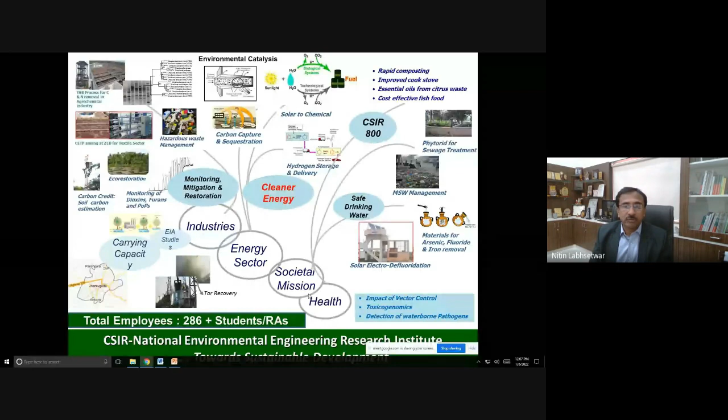This is a brief of activities we carry out at the Energy and Resource Management Division. Being at NEERI, we focus mainly on cleaner energy use rather than energy generation. We actively work on diesel emission control from automobiles as well as diesel gensets to reduce the environmental footprint. We also work a lot on catalysis, because catalysis is one of the ways through which you can control emissions. We also work on a process called chemical looping combustion, and if time permits, I'd like to give details, because this is one of the processes for CO2 capture.

Okay, and probably you will get more details in the next talk. A colleague of mine works on the fuel cell.

Then there are some problems which are specific to India, or developing countries, whatever you like to call it. For example, cook stove - you will be quite surprised that the health burden or environmental burden, mainly the health burden from cook stove or chula, is extremely high. Until a few years ago, it was probably the highest among all sources of air pollution. So in precise words, if you talk to any experts about 4 years back, maybe during 2015 or 16, what was the health impact from different sources of air pollution, they will say the maximum was from chula, not from automobile, and not from industry.

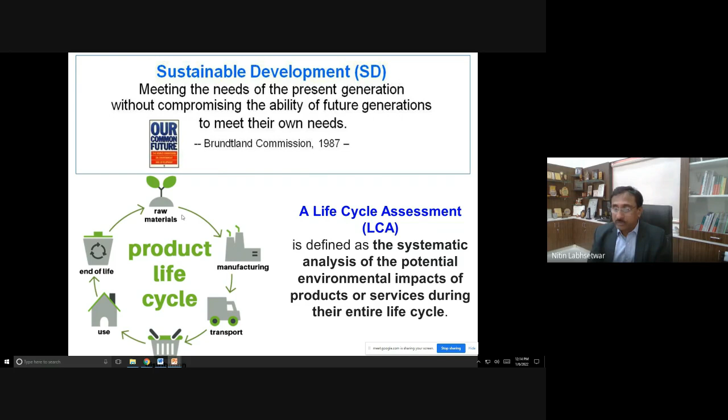It will also have environmental impact. So every process from cradle to grave is divided into different process components, and the environmental impact or environmental footprint of every bit of a process is estimated. And then you will suddenly realize that it's not so easy, or the process which was looking probably greener.

I have written LPG as a quick example. We all know the liquefied petroleum gas, it's propane. So I'm using say one cylinder, roughly 14 kg or 10 kg. I know the formula of propane, I know 10 kg of propane in a month will give me this much CO2. So I can calculate that I'm using one LPG cylinder per month in my kitchen. So my CO2 footprint of my cooking, or maybe I'm using a water heater also using LPG, is 10 kg of LPG per month, which is equivalent to say 20 kg of CO2. So I'm emitting this much.

It's not that simple. How is the LPG produced? You are extracting crude oil. For extracting crude oil, you are investing energy, so there is a footprint. Then you are transporting crude oil from Saudi Arabia to an Indian port, such a long way, and there is a CO2 footprint, an environmental footprint, because you are using a ship, and the ship has got a life. So after 20 years, I'm going to break that ship and produce a new ship, so I need to consider that ship manufacturing also.

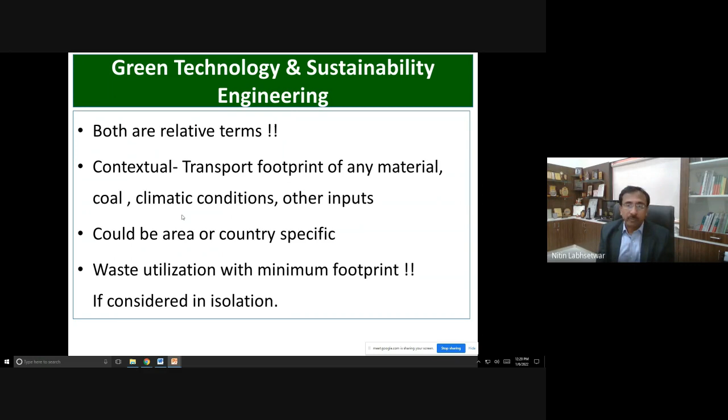So now, who all can contribute in this domain of cleaner technology or cleaner energy or green engineering? I believe almost everybody, especially engineers - chemical engineers, computer science experts, IT experts, even ENTC experts, chemists, biologists, geologists, thermal engineers, mechanical engineers. This is an area, in a broader way energy and sustainability, wherein anybody can work. But this also tells us that it is highly interdisciplinary, and generally collaborative approaches are very, very important. Even social science is important.

Now, a couple of slides on the impact of the COVID-19 pandemic. Now we are embracing the third wave, but so far the economic activities have not slowed down, for obvious reasons that we can't afford it. We have to manage with COVID.

But if you see the COVID pandemic, during the first complete lockdown there was a clear-cut reduction in energy demand, especially oil and coal, because there was an opportunity to use solar. Our power requirement was reduced by 15%, sometimes even 18 to 20%. So we reduced oil and coal consumption because we know those are dirty fuels, and we also knew that more or less the solar is coming for free - even if you are not using it, it will be produced and wasted.

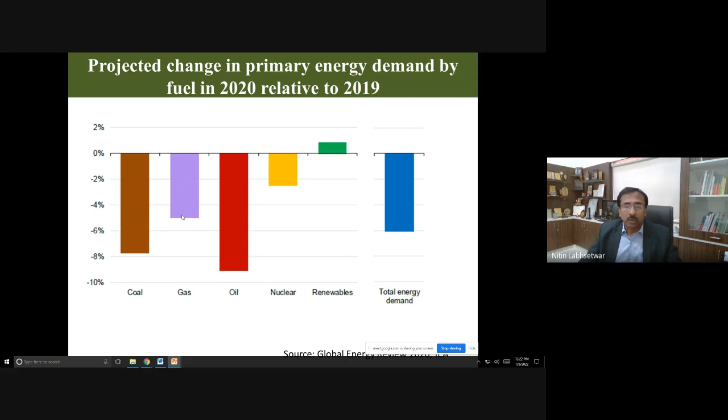This was the scenario during 2020 as compared to 2019 when we had the first wave of COVID. Obviously when fuel was used less, energy was used much lesser, so the CO2 emissions were also lower. This was evidence that the contribution to global or atmospheric CO2 is very, very significant because of energy use, because there is sometimes debate that natural sources are too many, including animals, vegetation, and biological processes.

But this was quite evident. Actually, I would say this was a very rare opportunity for environmental scientists and many other scientists to do a lot of experiments and try to validate what we are trying to correlate, based on the monitoring we do for CO2 and a lot of modeling that scientists throughout the world are doing.

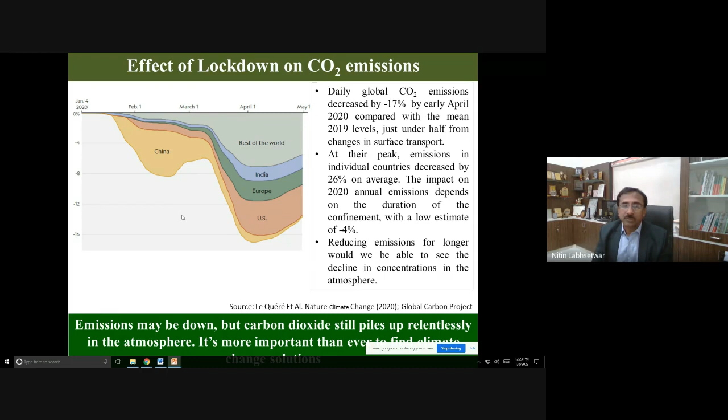So if it is true, this was an opportunity where we can find out that the CO2 emissions dropped, because we started using less energy, less fossil fuel. This was quite proven, roughly 8%, which was quite significant.

You must have seen these kinds of pictures that nature is back to its beauty and has already restored itself. But there were some over-enthusiastic conclusions that the government doesn't do anything, the agencies don't clean up, and nature did this job so quickly. It's not like that.

It's a competition between nature and human beings - how much capacity nature has to assimilate and to repair. That's a fact, and this capacity is huge. But as if we are competing - the nature can take care of this much CO2, so we'll try to introduce more CO2 - which is crazy, which is disastrous.

So this is very good evidence that while emissions were dropped by 8%, 10%, 15%, still nature was not able to take care of itself. These are very interesting findings.

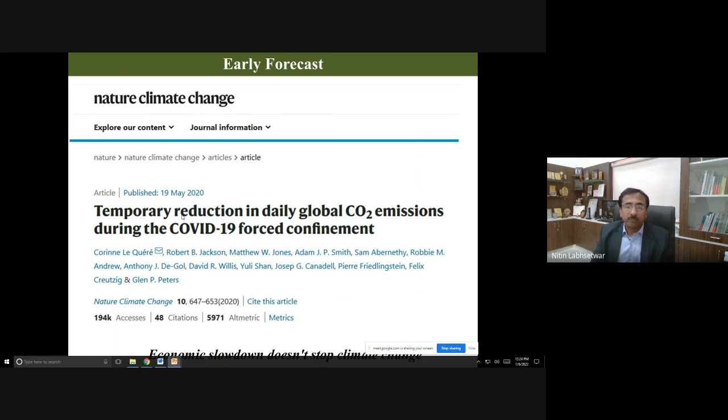First was the Spanish flu. Many of us were not aware of this word before - we got to know about it during COVID or the Corona pandemic. Then there was an economic depression, then World War II, and then finally the COVID pandemic.

Now, if you're not from the energy domain and you read the news every day, it's a bit confusing. Why? One day you will read that India's coal import is rising - we have enough coal, too much coal, but it's not clean, yet we still need to import.

The next day you will read something very good about solar - we have already attained like 100 gigawatts of renewable or cleaner energy, which was better than what we committed during COP21, I think 5 years back. Then the next day again you'll read something about thermal power plants. It's all confusing. And then the next day you'll read that climate change is the reality. So why is it so?

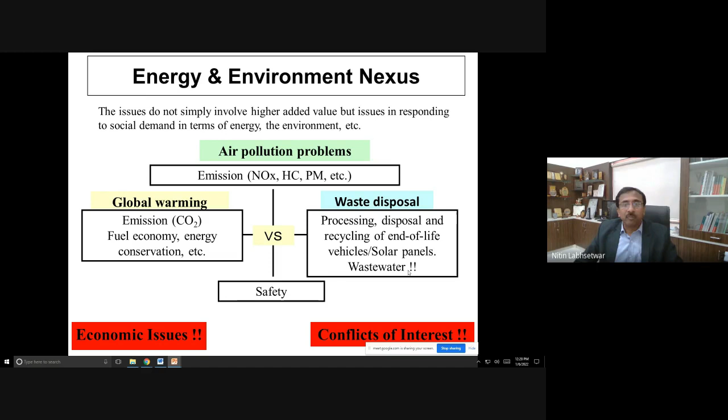Today, probably the global warming of CO2 has become very important, and at NEERI we often discuss that because of the global warming and CO2 problem, people don't want to deal with other problems, for example the sulfur dioxide problem, which is equally important. So this is the issue.

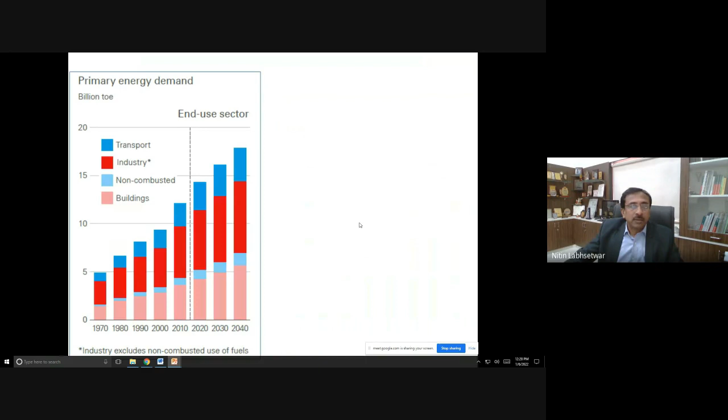Now if you see the growth of energy demand, we quickly see that India is probably the fastest progressing economy. Economy means energy, and energy means, of course, the CO2 footprint and the environmental footprint. This is the contribution of different sectors to energy consumption.

This is one of the databases, but things are changing very fast, so there are some changes. Even if you see the projection of credible agencies like the International Energy Agency, today we are at the beginning of 2022, and the way we are progressing in solar, it looks like by 2040 everything will be renewable. We don't have to worry.

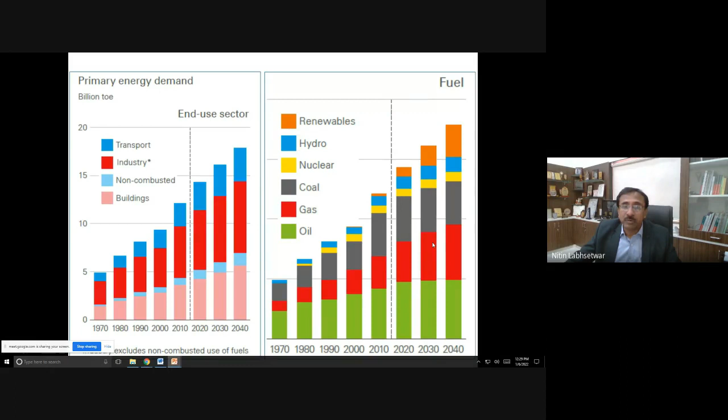In case of more energy, you can see coal, gas, and oil will still dominate even after 20 years. Why is this happening, when we are very clear that we are on a wonderful path of solar energy generation, biomass, hydrogen, and all these things?

The simple reason is this: today if you need 500 gigawatts, and say your share is 100 gigawatts from cleaner or renewable energy, tomorrow you are targeting 300 or say 250 gigawatts, so now you have achieved 50% by the cleaner route. But unfortunately, now your demand is no more 500 gigawatts, it is increasing to 700 gigawatts. And after a couple of years, when your renewable energy generation touches 500 gigawatts, and we are very happy that we are producing 500 gigawatts and all our needs are met by cleaner energy, unfortunately your overall energy demand will shoot to 1,000 gigawatts.

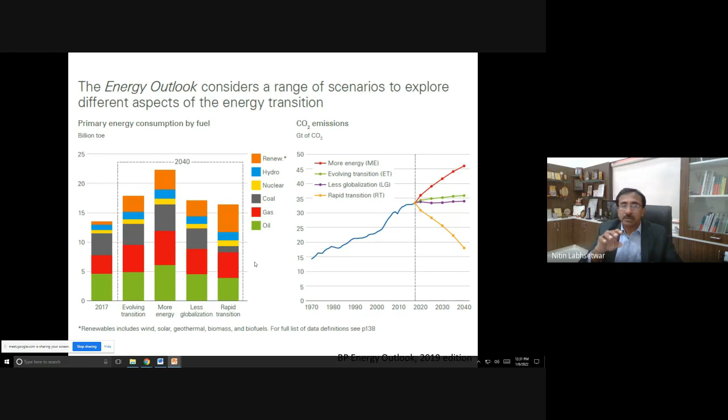And that's the reason why for the next two decades or more, we have no option but to continue with coal based energy as well as a combination of other sources, including fossil fuel or carbon based. We will have a mix. Let's be optimistic though, because if some innovation comes for hydrogen and other sources, our share of fossil fuel based energy production should go down. That's what is called rapid transition.

About 80% of the coal power plants are in India and 4 Asian countries. You must be thinking India is such a bad country, still using coal. No, we are among the best countries when it comes to renewables. We should also understand that for the last 100 years, the developed nations have been polluting. China polluted for the last 10 years, and now they are on the path of renewables. They probably have the best growth like India in renewables, they are touching 1,000 gigawatts. But when their turn was there to develop, they also polluted. So now it is our turn, and despite that, we are still using as much renewables as possible.

We cannot stop coal. Always remember, whenever we are debating energy and environment, these are secondary things for those who do not get enough food, enough water, or enough electricity. For them, the priority is to get good education and good food, so you cannot compromise on development. That's why it's a very tricky, very complex thing to talk about sustainable development. You cannot stop using coal unless you have equal amount of equal cost energy access through renewables, because no country would like to compromise on development, and it is necessary and justifiable also.

So under these circumstances, what becomes extremely critical is that we should not waste energy, whether in the developing world or the developed world. Because when we are talking about development, that I want to feed every hungry person, I want to educate every rural kid, for that I need energy, I cannot compromise on energy. So how can I afford to waste energy by, say, excessive air conditioning or many other means?

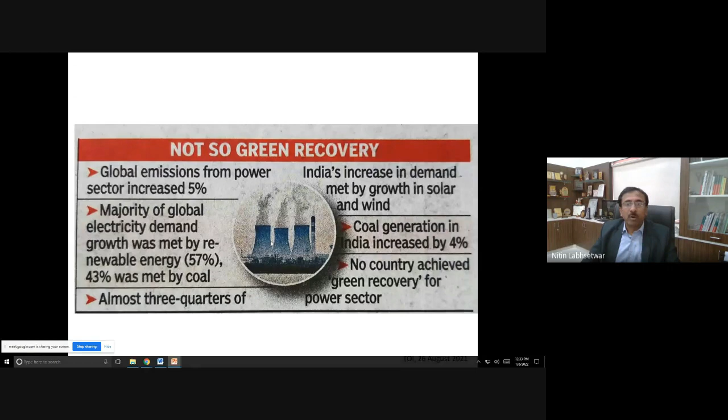So there's a huge amount of planning and modeling that goes into that. I'm not going to talk about it, maybe there are many experts. Now, one thing is for sure, that we need too much energy. We are trying our best to produce clean energy, including solar energy. We are doing our best.

But can we look into the consequences of global warming, which is happening? Unfortunately, it is already there and has been there for quite some time. But in the last couple of years, we have seen it with our own eyes. So that is making an impact.

Scientists knew, you also know, IPCC knows. They produce a report every year saying this is happening, that is happening. But now, when we see a disaster, like flooding, excessive rain, untimely rain, storms, drought, extreme temperatures, agriculture crop loss, then we realize, okay, yeah, it is happening.

Like COVID, the virus is there, we can't see it. When it starts hitting you, then you are worried. Not everybody is worried. When it starts killing you, then you are really worried. So the same thing happens as far as human perception is concerned. This is absolutely there.

So far, what we have discussed, the inference is: one, fossil fuel consumption is likely to increase for a few years, and after that it will decrease. But fossil fuel use or consumption will be there for a minimum of 2 to 3 decades. Unfortunately, there's no assimilative capacity left as far as air pollution is concerned and as far as CO2 is concerned.

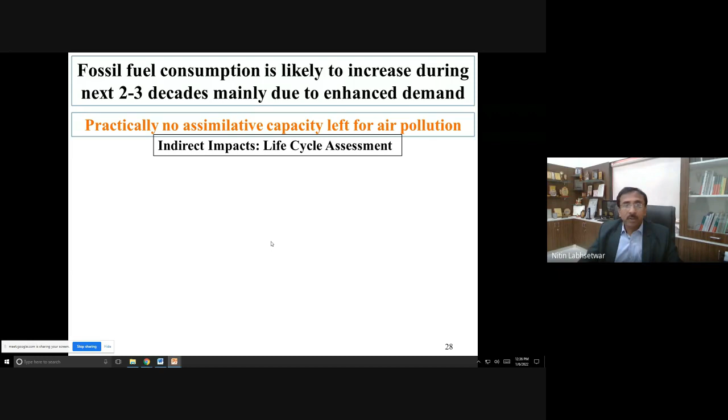Now, to understand the indirect impact, as we have seen, we need to do the life cycle analysis of everything. So there are two fundamental aspects of environmental pollution: one is greenhouse gas emission, the CO2, CH4, and others, which is a global issue. And the conventional pollution, like air pollution from a small industrial chimney, air pollution from your vehicle, say an old vehicle, air pollution from many other things, garbage burning, and all that.

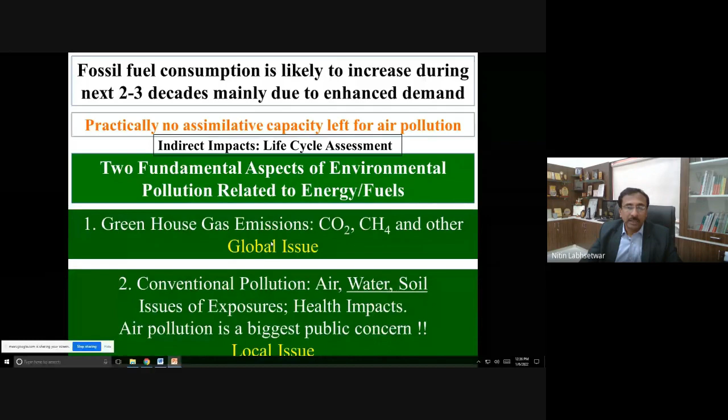Then there is a water pollution issue from energy production, soil pollution issue. There are health issues, for example, from the cook stove. These are the local issues. So let us quickly try to understand what are the CO2 or GHG emissions.

You will get the best literature, best slides after COP26, about what is the average warming projected for the next say 80 years. What is the issue with 1.5 degree? What is the issue with 2 degree? It's a very complex thing to understand. So you need some parameters which will be easy to understand for everybody, including scientists or professors like you, and then you can go into the complexity.

One such issue is global warming. We all understand the greenhouse gas effect, what are the greenhouse gases like CO2 and many other gases which get accumulated in our atmosphere. We get a lot of solar radiation coming to the earth, which is absolutely necessary for the earth to keep warm, to keep biological processes happening, natural processes happening. A fraction of this heat goes back to the atmosphere.

It gets trapped by these greenhouse gases, which were there, and it is required to be trapped. Suppose you get say 100 units of energy, out of which suppose 30 is going back, so you are left with 70, which is not enough for you. This is just to explain to your students. Suppose you are getting 100 units, 30 is going back, and there are some gases called greenhouse gases. Out of this 30, they reflect back say 10, and you are getting 80, which is required for you.

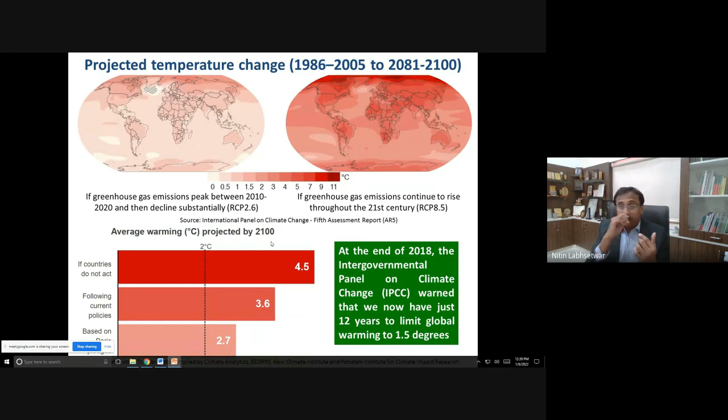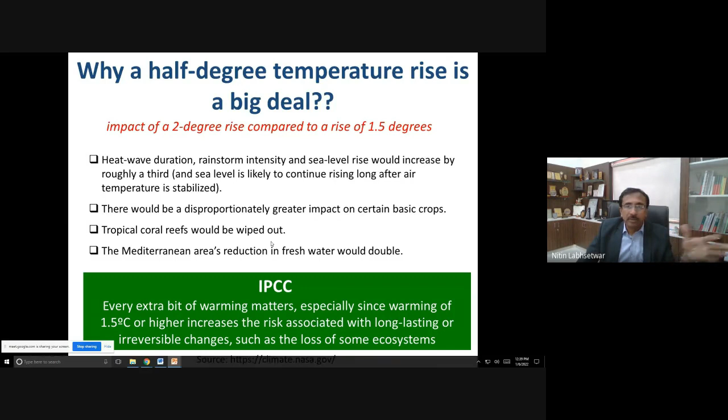So why does half a degree temperature make a big deal? Biologists can easily tell you, because most biochemical processes are very temperature sensitive. It can run havoc if you increase the temperature by 2 degrees Celsius. We have already seen so many coral reefs wiped out even with half a degree temperature rise, especially affecting marine biology and practically everything, as we've seen in the last two or three years.

So there are two questions. One is, what are the sources of these emissions? Second, why are the impacts so complicated, wherein we should also understand something like biodiversity.

I'm not sure we should cover biodiversity here, but try to understand from biologists that it's not easy to lose even one species, one plant or one animal species, because it can have serious repercussions. We are not losing just one species, because we have got millions of species.

So first, let us see what are the indirect emissions, or the emissions we need to tell our next generation, especially students. For example, moving or transportation. So cycling is the best.

So you are cycling every day, say 10 kilometers, which is a good habit. If you are using a bicycle instead of a car to go to your office, you're doing a great job because you're reducing your CO2 footprint. But if you are eating too much and doing cycling just to maintain your weight, I don't think you're doing any good.

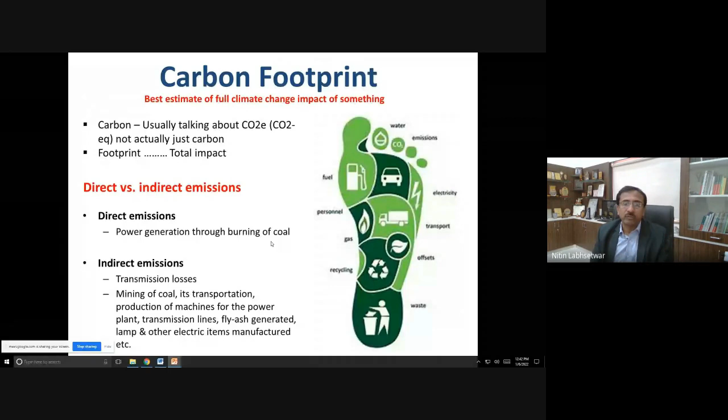This is something to do with water. One quick example: to produce one shirt, you need to consume on average 2,700 liters of water.

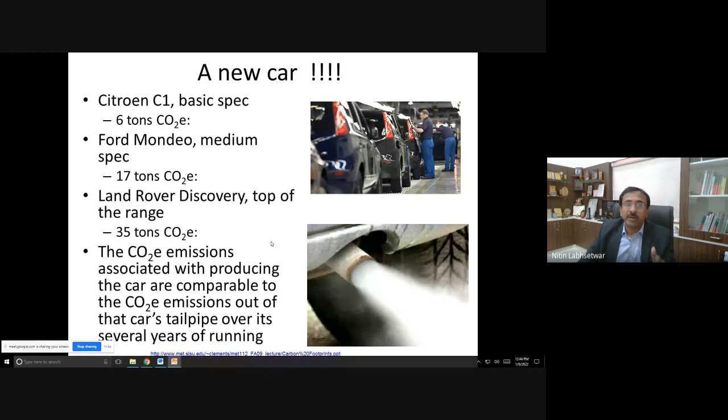So this is one example of water footprint. Similarly, we understand that to produce a new car, we need a lot of energy inputs. It's not easy that we calculate only the CO2 from the exhaust coming from the fuel. We need to understand the footprint during the production of the car.

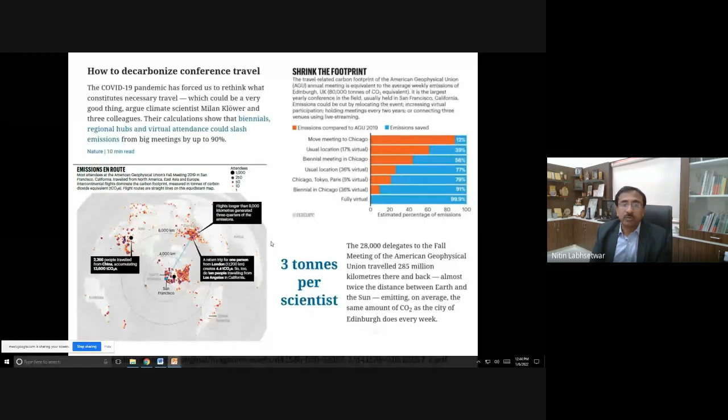This was a very nice example. Last year our conference was turned into an online conference, and everybody was disappointed. But there was a calculation of how much we could save, 3 tons of CO2 per scientist because of this online format. Today, for example, we are almost 40-50 people, and I'm here, and we didn't travel. It may not be making that kind of an impact because we are not having an eye contact and we are not together, that's a different thing. But today we are going to save a huge amount of CO2 which is coming through travel. So these are the efficient ways.

There may be hundreds of microorganisms living or surviving in the body of the tiger, on the tongue or skin of the tiger. And if the tiger dies, maybe 1 or 2 or 5 microorganisms can't survive. We don't care about those microorganisms, but maybe those microorganisms are responsible to control the growth of some virus. So tiger gone, 5 microorganisms gone, another virus is proliferating. So these are all interrelated, which is very hard to understand, hard to map in fact.

So the best thing is to save each and everything nature has given to us. It's not easy to say, oh, this much is lost. So we need to look into the carbon footprint of all resources we consume, and the carbon footprint of final energy delivery. Life cycle assessment or life cycle analysis is a very useful tool to understand different energy options, different production issues, different processes, and how to reduce the overall footprint of energy. We understand for our life, we need energy, for practically everything we need energy.

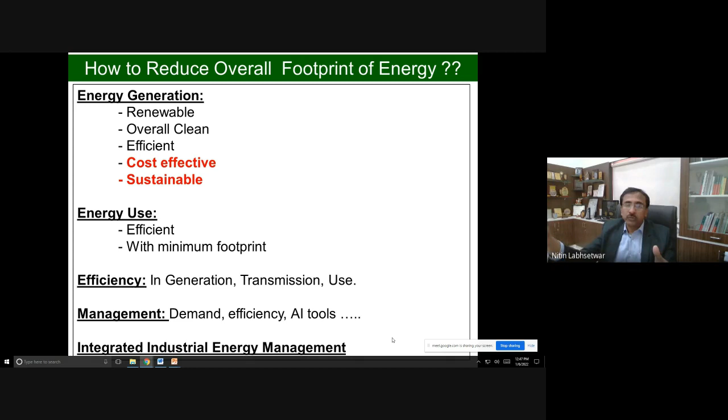So this is why energy management is very important. You need to have generation and demand management. One of my colleagues works on AI-based tools which can be used for so-called energy islands. We can imagine a village which has got 2-3 sources: solar, some supply from the electricity board which is coal-based, some biomass-based. There are cold storages, household requirements of energy, and a few processes. So we can possibly optimize the energy use and production in such a way that we can push many things toward renewable, and maybe in a more efficient way.

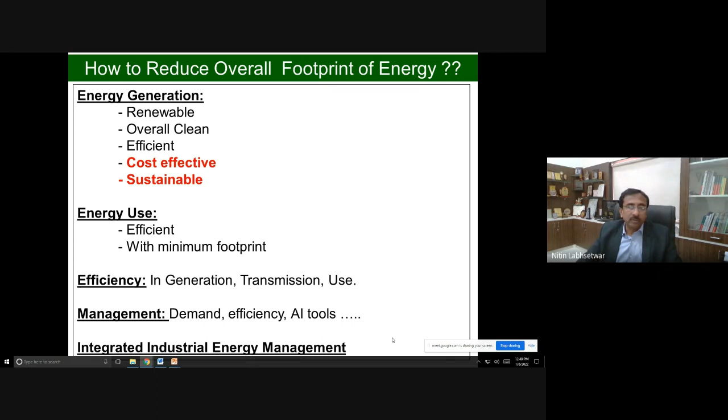So today, efficiency is the buzzword. These two slides I borrowed from Dr. Sonde, who is one of the best energy experts in the country, I believe. So first we should see the energy generation. The reality is, did we care for the way energy is generated?

Then we all know that from the power plant, the electricity needs to be transmitted to other feeders and from there to your home. So there are transmission and distribution losses—again we lose 15 to 20%. So what was available theoretically to us, we almost lose 75 to 80% during production and transmission of the energy produced, before it even reaches your house.

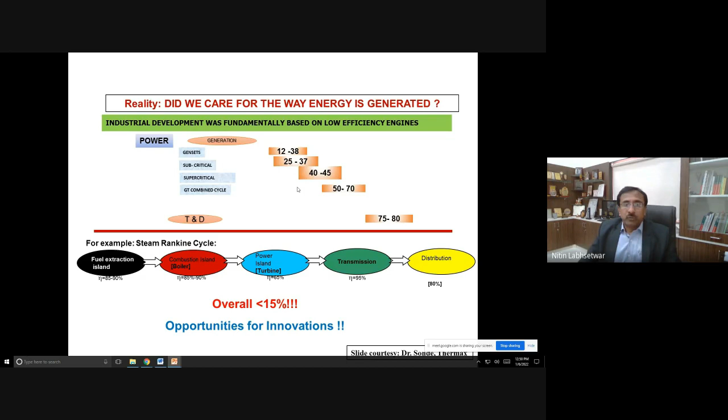So we have seen that we have already lost about 75 or 80% of energy. Now it reaches your home, and we use that electricity for different purposes—for compression, like refrigerators, coolers, and for illumination. These are the typical energy efficiencies on the demand or use side. Automobiles, furnaces—again the scene is the same. Sometimes it's 30%, sometimes even 20%. In cook stoves, it's not even 20%.

In air conditioners, nowadays we have new generation options like 5-star and inverter air conditioners, maybe reaching 50% efficiency. But you had already lost almost 75% before that. So whatever 20-25% you have, again you are losing no less than 50%. What does it mean?

We talk so much about the CO2 coming from energy, and we realize that almost 90% of the CO2 is coming from energy wastage, which is of course because of some theoretical limitations and some technology limitations. But it's worrisome that today whatever CO2 is there, it is only because of the 10 or 15% of energy actually used, and the rest is being wasted.

Now, where is the opportunity for innovation, and what is the proof? Illumination is a proof. Initially we used the bulb, which used to give us 10 to 20% efficiency. Now we even have LEDs, very advanced, where you can touch even 70% efficiency. So you have jumped from 20% to 70%, saving something like 40 to 50% of energy in illumination today.

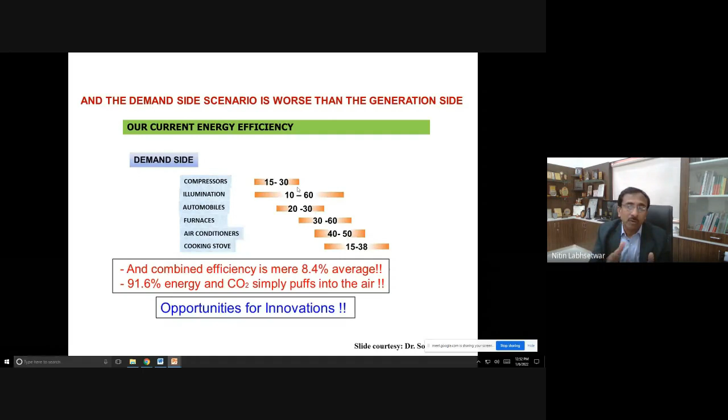So at NEERI, we did an exercise. It was our division's responsibility, and our bill was roughly 2 to 2.3 crore per year in electricity charges. So like any other institution, the objective was to reduce energy consumption and also to reduce the footprint of energy—there were two basic objectives: reduce whatever electricity we are consuming by using it efficiently.

And second, let us try to reduce the environmental footprint of that energy use. So what we actually did was a workflow to identify the energy saving potential of our institute.

We did a basic energy audit and a lot of data collection. Then there were two plans, one of which was to reduce the carbon footprint. It's very simple: if you want to reduce the carbon footprint, instead of fossil fuel based energy, you need to generate or use renewable energy.

We did a cost benefit analysis to encourage other CSIR labs, looking at the investment needed. From 2016 to 2020, we achieved energy saving of about 20%. Initially we thought the payback period would be 5 to 6 years, for example where we replaced air conditioners with efficient ones.

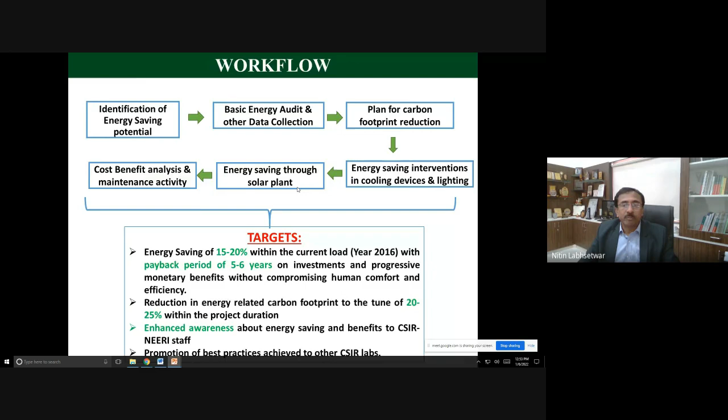We also installed a solar-based power plant. These were the two major interventions. This is the primary data we got from different departments. You can see here that 60% of the load was from air conditioning.

Everybody wants air conditioning, sometimes we need it, sometimes it's in the name of equipment. Sometimes we need 26 degrees Celsius, but I like 22 degrees Celsius, which according to me is absolutely useless. There's no reason we should use 22, 21, or 20 degrees Celsius air conditioning. So this was our load distribution.

We targeted the air conditioner sector and could convince some people that we could replace some ACs that were not required. We tried to convince them, and we did a lot of awareness campaigns that people should use 24, 25 degrees Celsius.

One very small question you should ask people is: when do you start using AC? In winter, Nagpur has maybe a maximum temperature of 30 or 28 degrees Celsius. Do I need AC? No, it's winter, I'm wearing a jacket. That means we are comfortable in the range of 25, 26, 27, even 28 degrees Celsius. Then why do you need 20 or 22 degrees Celsius? So we started working on that.

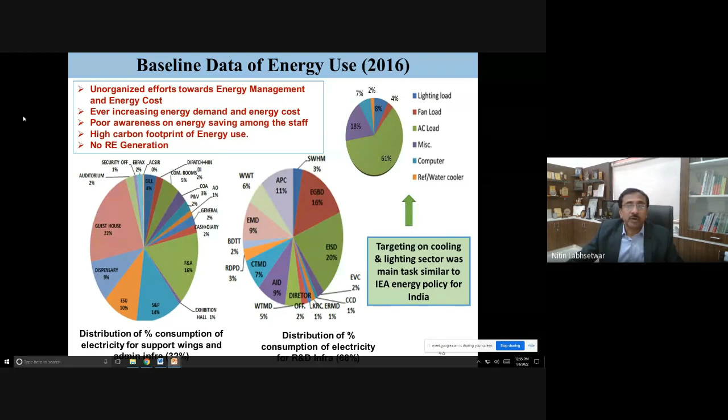We've done many things. We installed a 178 kW solar-based power plant under a very good RESCO model, so we could reduce the carbon footprint through this. We replaced 83 ACs, and we also introduced centralized cooling at some places.

Just like in my division, we had centralized cooling instead of a couple of ACs, so we could save at least 4 to 5 ACs through centralized cooling. We replaced 1200 tube lights with energy efficient options and replaced 480 fans.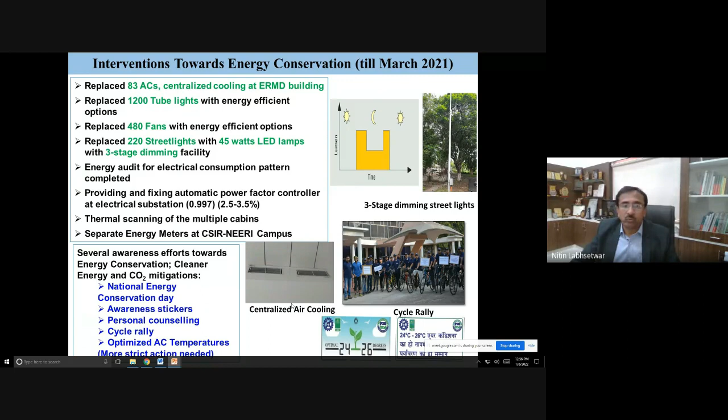We had a lot of awareness campaigns telling people not to use AC below 25 degrees Celsius, and through that we achieved a significant amount of saving, both monetary saving and electrical load saving.

It was a little complicated for us because of COVID to understand the full picture, but we had several measures to find out the savings, and you will be surprised that the payback period was pretty handsome, in some cases not even 2 years.

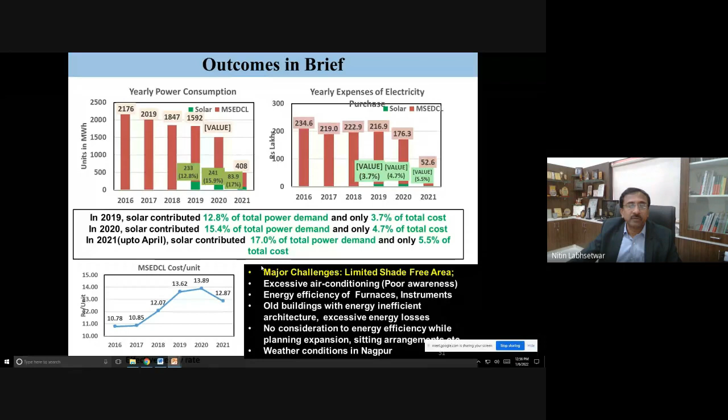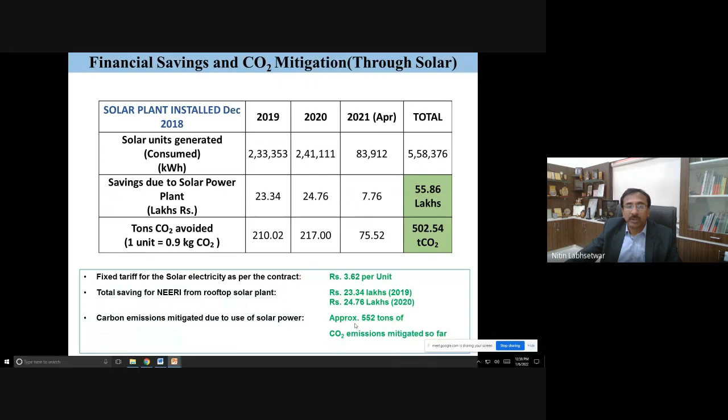This is our statistic of how much solar energy generation there was and how much we can save, it's very, very attractive even today. In terms of CO2 emissions, more than 550 tons were mitigated mainly through solar, and when we introduced other interventions, this figure doubled.

Today, until April '21, we have achieved no less than 1400 tons of CO2 savings. These are the different savings, it's a pretty attractive proposition, and whatever we asked under this project we have given back to the institute, and obviously they are quite happy.

In addition, under a pan-CSIR project, we are now planning a possible expansion of solar power, because there are innovative companies that can increase your solar potential in any area. We're also looking at seasonal load management, energy audits, and many other things.

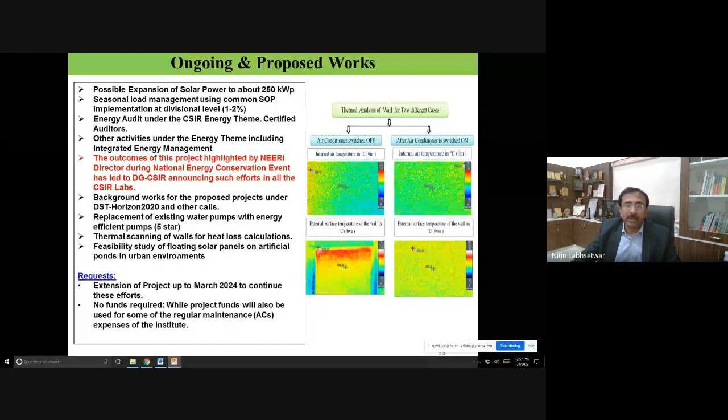Honestly speaking, thermal scanning of the wall, like in a green building lecture, would show what kind of wall should be there. But there are paints available that can take care of your heating, you can have a rooftop painted or a wall painted. So there are different options.

Again, you have specific talks on these domains. The typical options for clean or sustainable energy generation are solar, hydro, and wind.

Many of you know that last year on 15th August, our Honorable Prime Minister announced that we touched the 100 gigawatt figure. Everybody thought that out of 100, maybe 80 would be solar, because we see solar everywhere. But solar was a late entrant because solar panels were not very efficient 10 years ago. The way India has introduced the solar program is probably the most impressive internationally. Solar at that point was about 45 gigawatt, and we had more wind, plus a bit of hydro and nuclear.

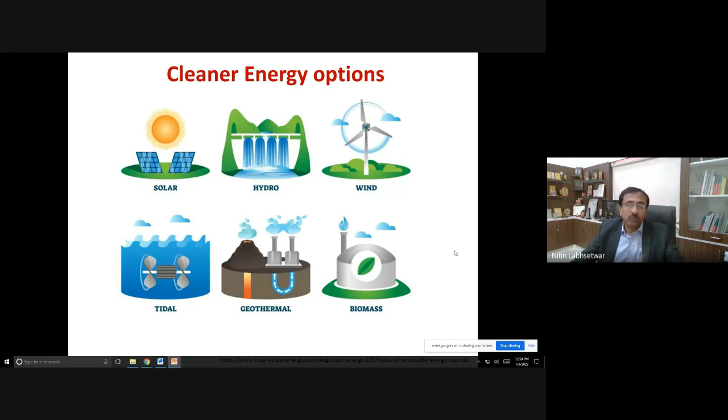But now solar has exceeded wind and everything, and in the next 5 years we are going to have a main focus on solar. What I was trying to explain is that for the different options of energy generation, we need to do an in-depth analysis.

This is the CO2 footprint of solar panels during their production. It requires some kind of high temperature process to produce the silicon wafers and all that. A solar panel has a life of say 20 years. So you need to calculate that a solar panel produced—say 1 by 1 meter—has emitted CO2 during its process, and that becomes the CO2 footprint for solar.

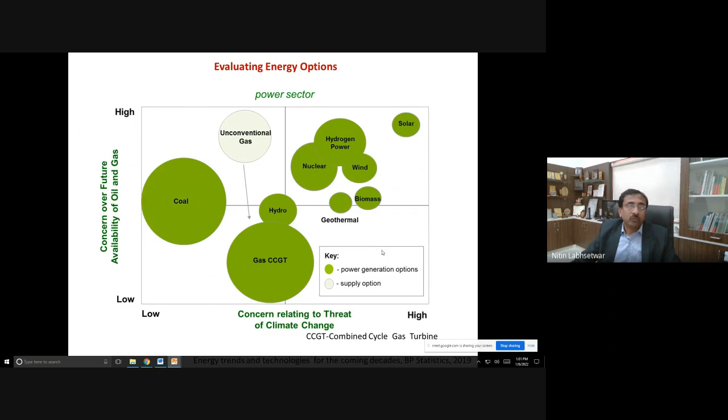So it's a great opportunity. This is how they evaluate the different energy options: availability, environmental impact, cost, and CO2 impact.

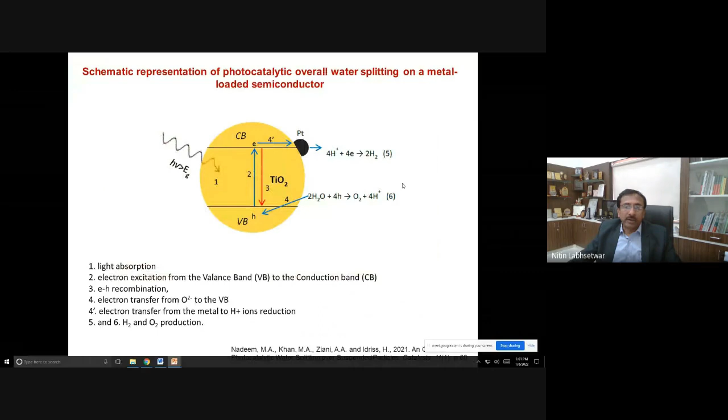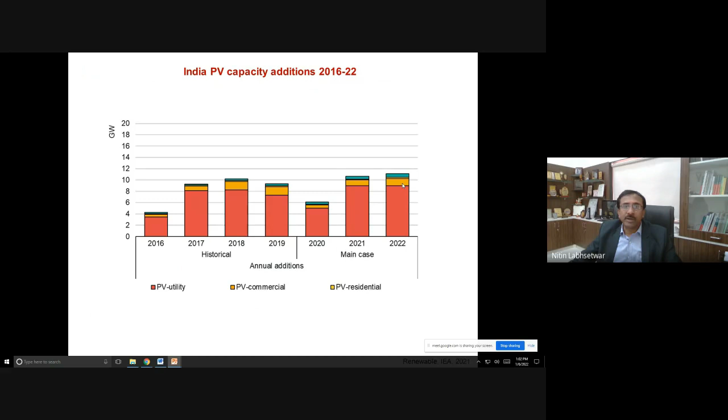This is renewable power generation as far as India is concerned, and this is India's PV capacity addition during the last 5 years, which is very impressive. I am repeating these things.

Hydrogen energy is being given a lot of importance, and we have a program coordinated by the National Chemical Laboratory—a PAN CSIR program in which many aspects of hydrogen energy are being explored. Hydrogen is being produced conventionally—how do you produce ammonia or fertilizers? You need a lot of hydrogen. Those are produced at industrial level.

But unfortunately, the process to produce hydrogen was pretty dirty—they used to use fossil fuel, or natural gas basically. That is known as gray hydrogen, because it uses some carbon-based fuel source, which emits CO2. Now, what is blue hydrogen? As I told you, why energy use is also important, not only energy production.

Even if you are producing hydrogen using fossil fuel, which generates CO2, if you are taking care of that CO2 - which will be dealt with in your next lecture - then the environmental impacts or footprints are reduced, although your source was fossil fuel. So you produce hydrogen, CO2 was generated, but you take care of the CO2. That is known as blue hydrogen.

But what is green hydrogen? Here you are not even producing CO2. For example, water electrolysis - water is a great source of hydrogen. You can split water into hydrogen and oxygen. Electrolysis is one common technology, but it needs electricity. So if you are producing this electricity through, say, solar panels, your electricity is clean, and through that you are producing hydrogen. That becomes green hydrogen.

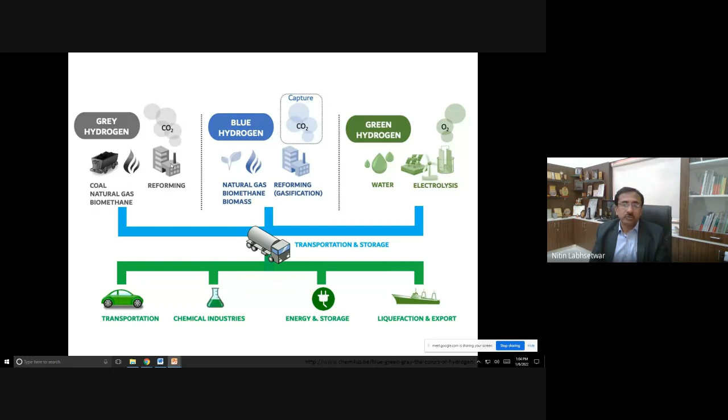But then you are producing hydrogen - so what is the advantage of hydrogen over solar? To store solar energy, you need a battery, and battery has its own problems. So what you are trying to do is convert solar energy into electrical energy, and then either store it in a battery or convert this electrical energy back into chemical energy in the form of hydrogen. So hydrogen can be stored. There is a lot of research going on in hydrogen storage - you must be aware, or may be working on that, for all kinds of applications.

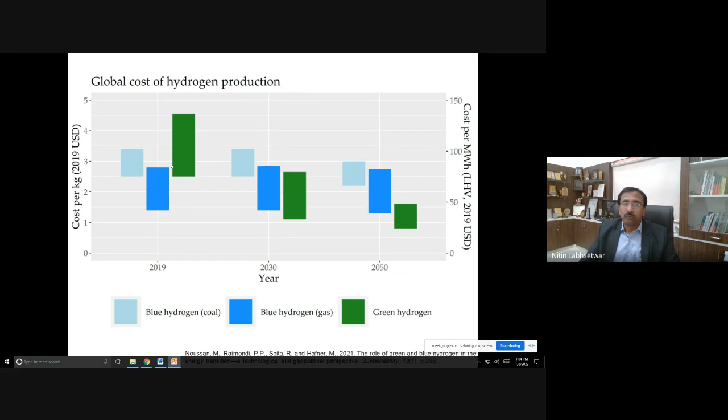This is the global cost of hydrogen production, which is going down - quite a good revolution - and I'm very hopeful that in the next 5 to 6 years it should become a reality. This is the green hydrogen production, conversion, and end use across the energy system.

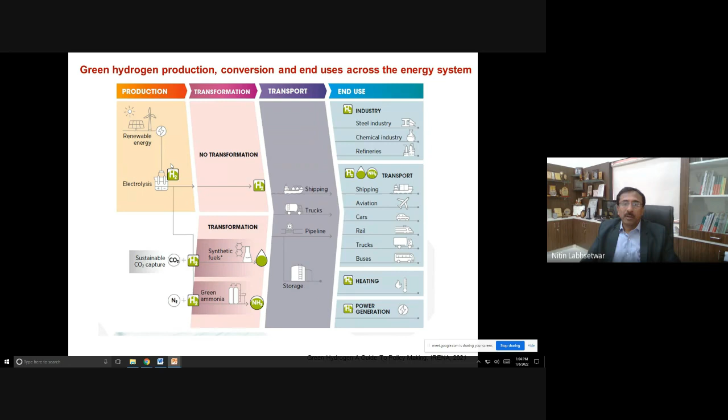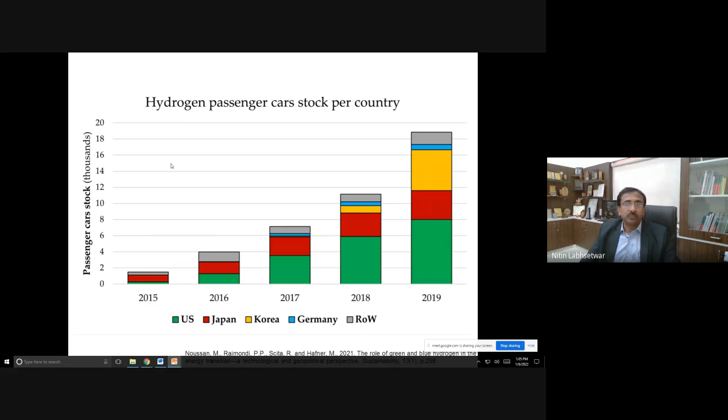I'm not going to read through it, which I normally hate. So the concept is there are 3 types of ways to produce it.

I think I'll stop in another 10 minutes - is that okay? 10 to 15 minutes I can take. Hello, can somebody confirm? Yes sir, it's clear. Fine.

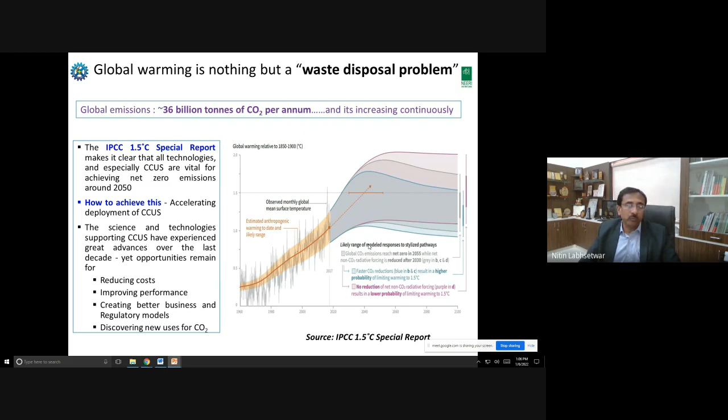So now we have understood that, for example, you need to produce hydrogen, or you need to produce electricity from coal, because India has a lot of coal and it's the cheapest form of electricity available to us. So can we do something with the CO2? I think the next talk is about CO2 capture technology, energy efficient CO2 capture technology. I'll just introduce you to this problem. We can say global warming is nothing but a waste disposal problem, because CO2 is a kind of byproduct of the waste we are producing during generation of electricity or energy using fossil fuel or carbon-based fuel. Now, if you want to deal with this CO2, how do you deal with it?

There are 2 aspects of it. What are the 2 aspects? One is you need to capture it. Why do you need to capture it? For example, you have a coal-based power plant, which uses air for the combustion of coal. The air contains 78% nitrogen, while our interest is the oxygen present in the air. So when I combust any fuel, say methane or coal, with air, it will produce CO2, but it will have a lot of nitrogen. So the exhaust we get generally contains diluted CO2, in a typical range of say 10 to 15%, and the rest will be nitrogen and a little bit of oxygen. Now, if you want to use this CO2 for any purpose, to produce some chemical using this CO2, you need a pure form of CO2.

Naturally, with chemical reactions, if you have a pure form of CO2, it can be used for some food applications or some chemical applications. So the first requirement is to pre-concentrate this CO2, which is available in the exhaust at about 12% concentration, to say 98% concentration.

For that, there are many methods which you will deal with in the next section, like absorption based, or some advanced processes. Once you have produced 98% CO2, then possibly you can convert this CO2 into some chemical. There is a reforming process, through which you can convert this CO2 into say syngas.

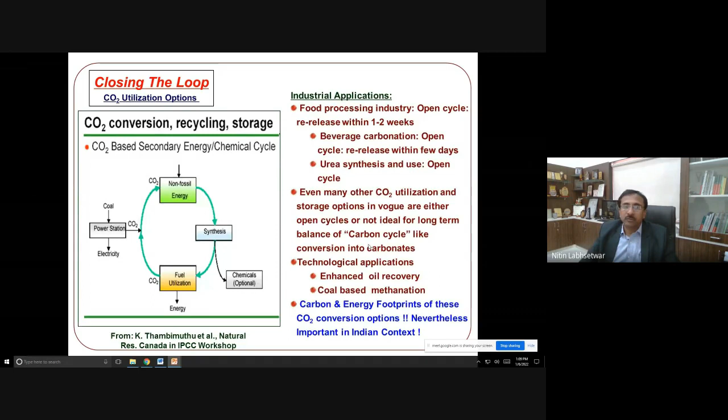So these are fantastic R&D challenges under which there is wonderful advancement. There are bench scale or even pilot scale demonstrations for these processes, including in the Indian context. India has a huge program, and we are going to soon have a CCUS center at NEERI, the Carbon Capture and Utilization Center, supported by CSIR and industry.

I'm not going to run through much of these things, because everything is available on the internet. The only thing is you should go into credible sites.

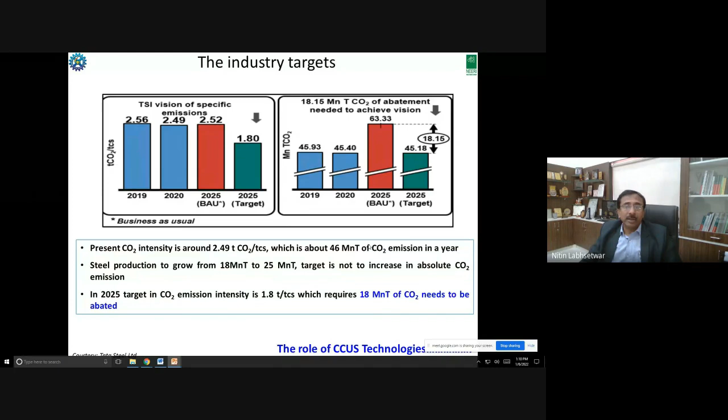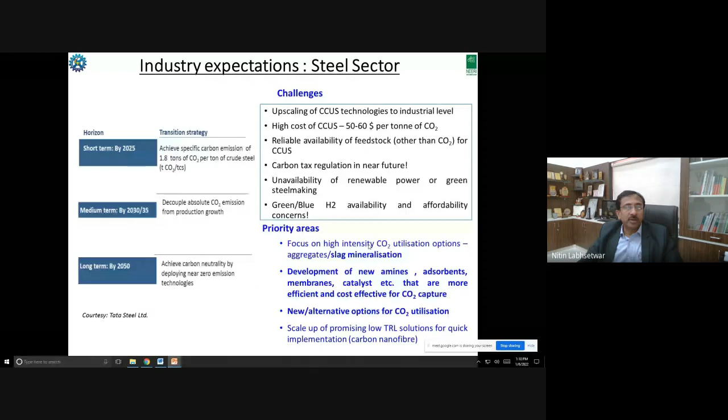This is the industry expectation, for example from the steel sector: what is expected short term by 2025, what is medium term, what is long term. Most of the industries have already started working on this.

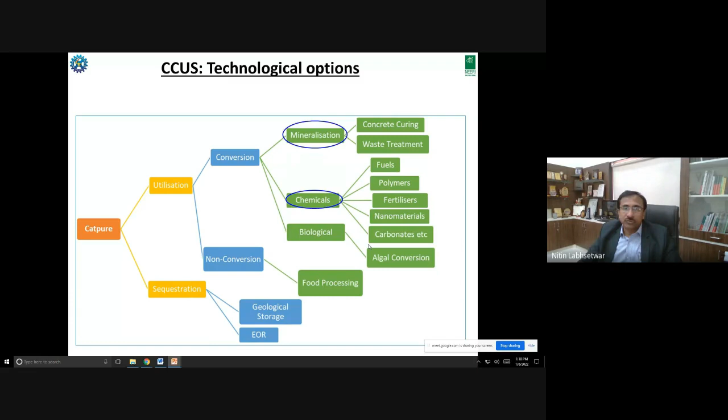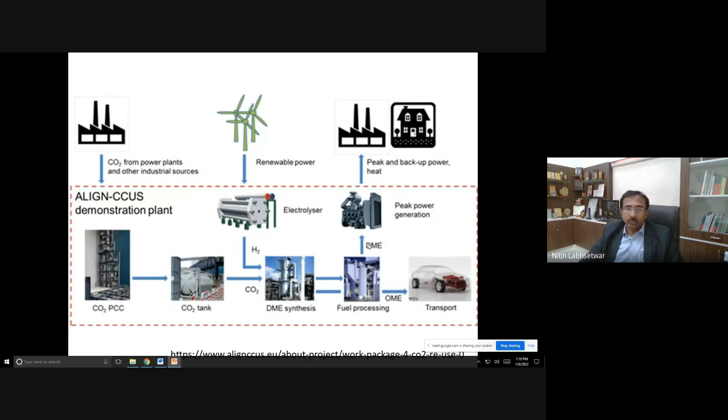So these are the different options for CCUS - carbon capture, utilization, and sequestration. We are going to deal with this in your next lecture, probably on carbon capture, but utilization is also there. Plenty of possibilities - the only issue is how energy efficient and how clean your process is to convert CO2, which is otherwise a stable molecule. This is sometimes called CO2 activation, sometimes called by different names.

This is what is known as CO2 sequestration. The basic difference between CO2 utilization and CO2 sequestration is: utilization means you are converting it into some chemical, which we have seen in the previous slide. There are also possibilities that CO2 can be captured and stored.

Like there are reservoirs, similar to oil reservoirs. Once you extract the oil, there is some space available, so for extracting oil you need to press something in there, you need to introduce something like air. So instead of air, you can just dump CO2 in there. That's known as geological sequestration.

So utilization is converting CO2 into useful chemicals or useful products, and sequestration means safely storing it somewhere. But that also should be energy efficient.

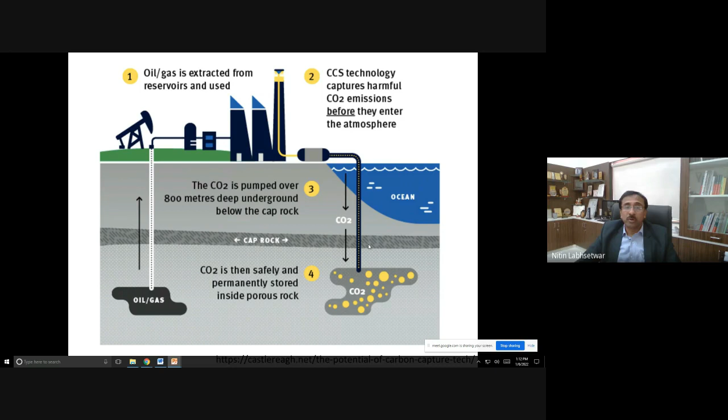Otherwise, you need to transport CO2 from, say, a thermal power plant to a geological sequestration site 500 kilometers away. If you're transporting it in a truck using diesel, your CO2 footprint is higher than the CO2 you are carrying - these are the challenges. Second, it should be very, very safe, environmentally safe and otherwise safe - there should not be a leakage, and there should not be consequences of it.

Now, industry is interested, and remember, when industry is interested, that means there is a good future - something is happening. So in hydrogen, industry is interested; solar is well established now; even in CCUS, industry is interested, and this is the carbon capture and sequestration market, because there will be plenty of funding available and plenty of regulation or compulsions to achieve CCUS. That's a huge market.

I remember one of my students - not my student actually, an intern from an engineering college in Pune. He was a chemical engineer, and to my surprise and pleasant surprise, he said, 'Sir, I want to work on this carbon capture area.' He was here just for 6 months. I said, 'Why not?' Then he got admission for his MS at Imperial College London, where he's actually pursuing his master's in this. He says his professor and many professors see this as a future R&D and future technology - a good area to work on.

Okay, give me one second. I have some water.

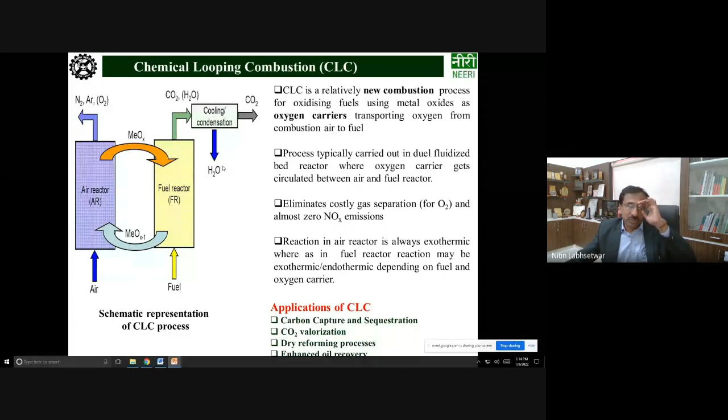So there's one possibility - instead of oxygen, we can use some metal oxides, like copper oxide and nickel oxide. We can have a bed of nickel oxide at 800 degrees Celsius and introduce methane. This methane will react with the oxygen of the nickel oxide, burn, and produce CO2. We can capture the CO2, and the nickel oxide will get reduced to nickel metal.

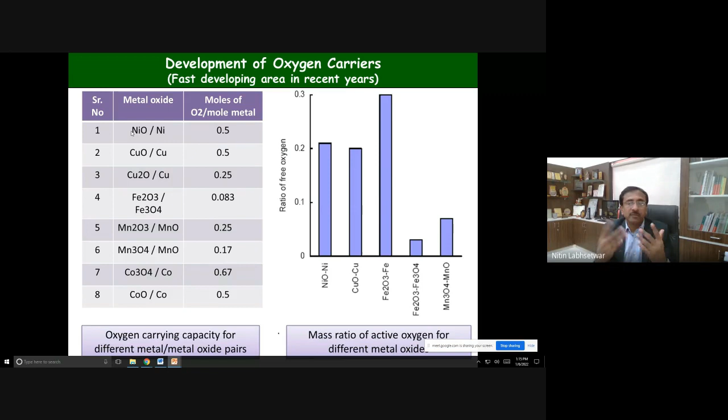Now in the next cycle, instead of methane, we introduce air. Once you introduce air, the nickel metal gets reoxidized into nickel oxide, and this is an exothermic reaction which provides a lot of energy. That's why it is known as chemical looping combustion, because it forms a loop.

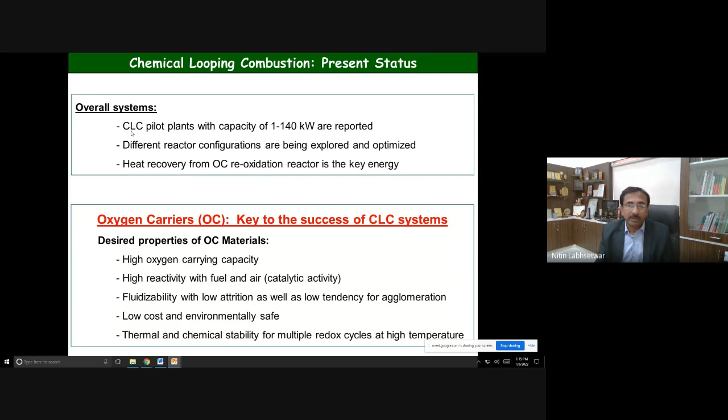This is a relatively new process for which we need to develop new materials, known as the oxygen carrier material, like nickel oxide. We are working on some mixed oxides of this kind, probably reported for the first time along with one Swedish lab, which also reported around the same time. So we worked on this oxygen carrier generation, and then we tested it.

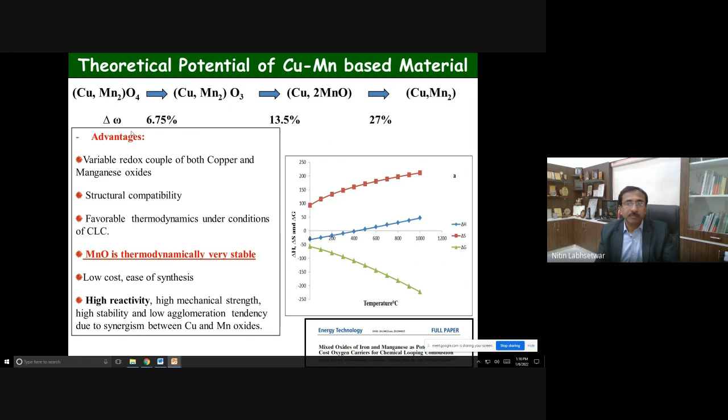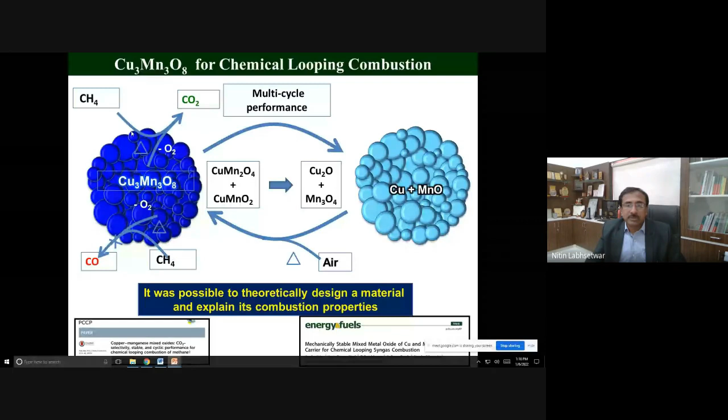We did a lot of typical characterization and evaluation using steady state, fixed bed, or plug flow type reactors. Then we found out how much oxygen it can carry to burn a fuel - that's the first requirement. Second, it should be thermally stable, obviously, since the combustion happens at 800 degrees Celsius. Then we worked on the mechanistic aspects. We have some publications if you are interested.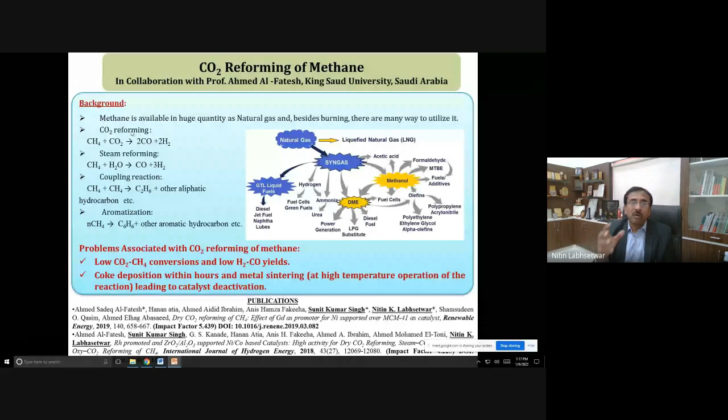With one of my postdocs, I am also working with a collaborator from a Saudi university on CO2 reforming of methane. As I mentioned, you can convert CO2 into something useful, but the question is how much energy and how much temperature you need. Otherwise it's useless, because if you need a very high temperature, you need electricity to generate that temperature, and you need coal again to produce that electricity. So there are catalytic processes which can lower the temperature required - catalytic reforming of CO2 with methane is a very common topic, and you must be aware of it.

So this is all about generation of cleaner or renewable energy, and then CO2 conversion or CO2 capture. But as I mentioned, energy generation is important, but energy use is also equally important.

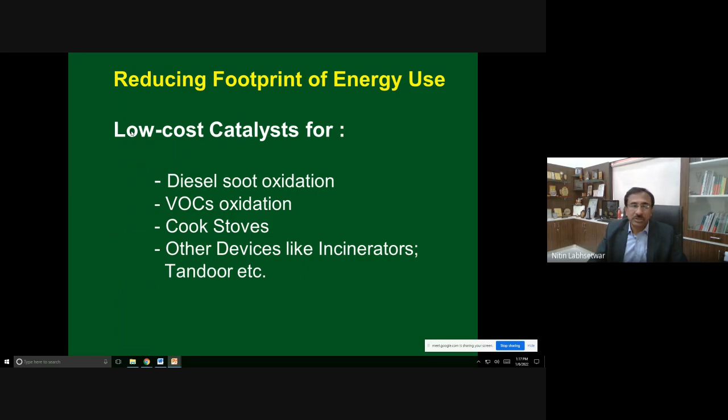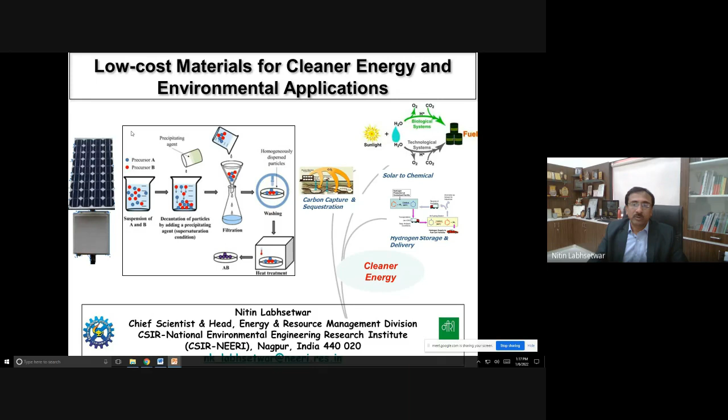So we work quite actively on low-cost catalysts for applications like diesel emission control, VOC oxidation, and cook stoves. The buzzword is low cost, because normally the catalyst is made of platinum or palladium, which are quite costly. So we are working on diesel soot oxidation.

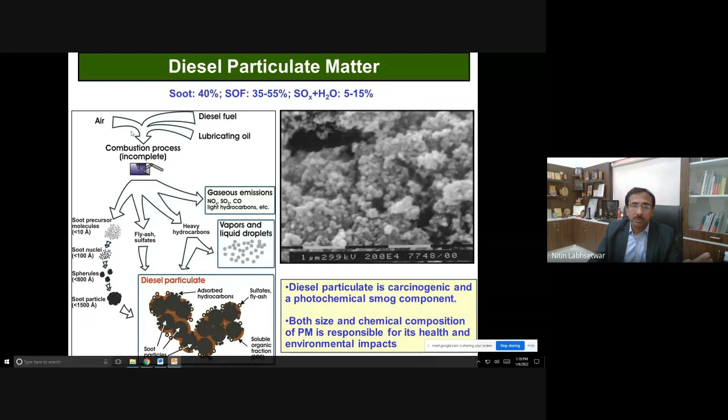This is how diesel soot or diesel particulate emission particles look under an electron microscope, and this is how they are formed. There is a device called a diesel particulate filter - if you fix this device in your diesel car, it will trap those soot particles. These are commercially available and can give up to 95% efficiency in trapping soot particles. But the challenge is that after some time this filter gets blocked because there is too much soot and the exhaust cannot pass through it. The only way to clean it is to burn it.

Unfortunately, it burns at about 550 to 650 degrees Celsius, while the diesel exhaust temperature is quite low. If you go for electrical heating, again you have a carbon footprint and a cost.

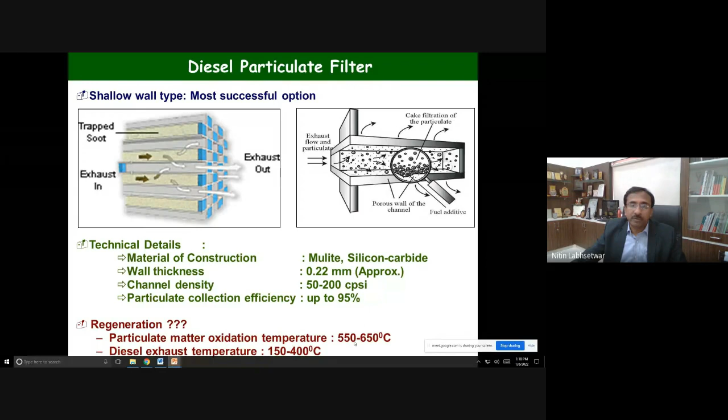So a catalyst can possibly lower this temperature from say 550 degrees Celsius to 300 degrees Celsius. Many people are working on this worldwide, and there are commercial technologies from a leading catalyst manufacturer.

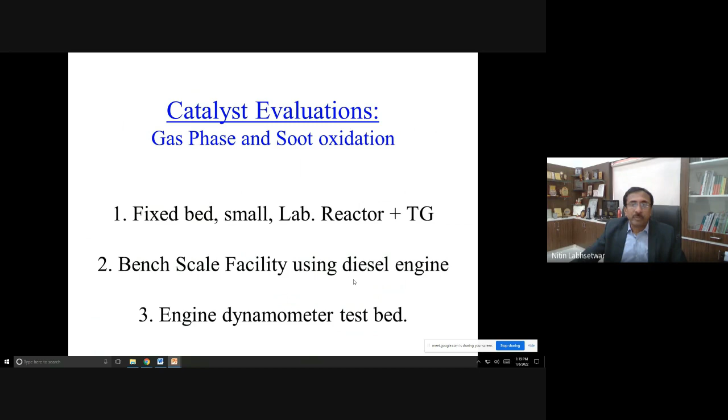So we prepare lab scale catalysts, several of them, and then we have a 3-stage catalyst evaluation. First we evaluate these catalysts in the lab. We prepared 30 catalysts, evaluate them in the lab, then shortlist, evaluating under different conditions including steam and so on.

Then we prepare a small scale prototype, and we sometimes use Kyushu University facility to evaluate this, say 100 cc or 200 cc prototype. There's a small diesel engine kept here, and the diesel exhaust is diverted, and the soot is catalytically combusted, to see how efficient this is.

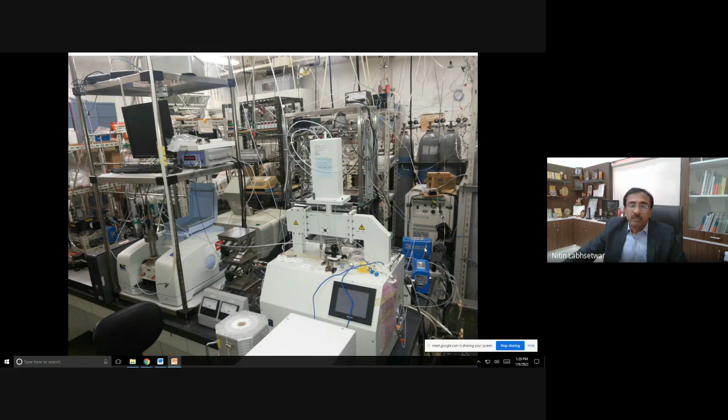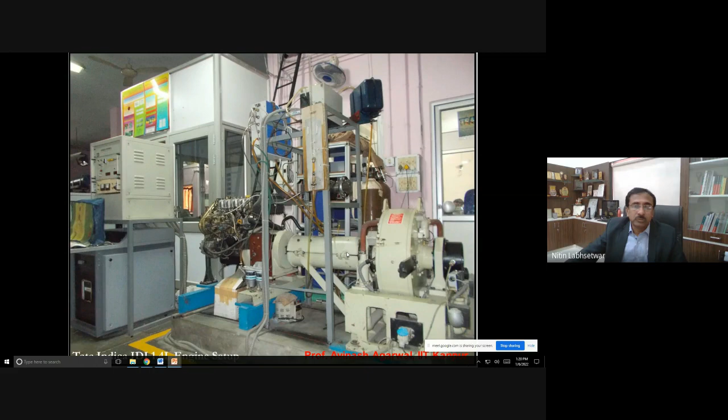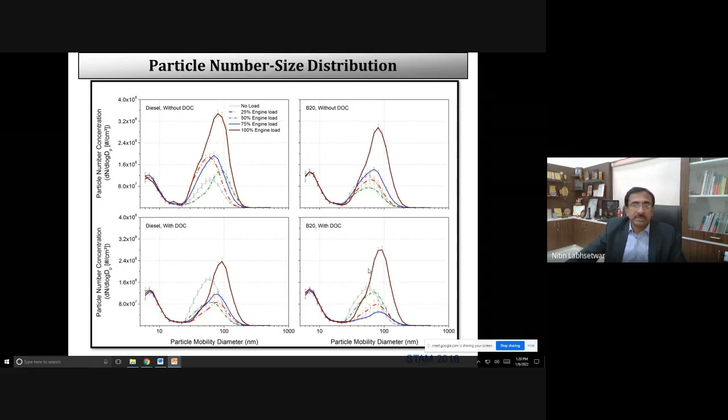So you get this kind of data showing the particle number before your device and after your device, and the reduction in particle number tells you how efficient your device is. It's very important to understand.

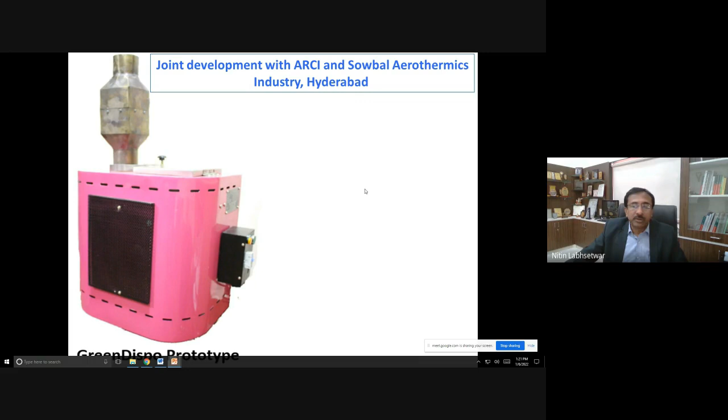Now at NEERI, we also try to improve the energy efficiency of some waste-related devices. This is a sanitary pad incinerator we developed along with ARCI Hyderabad and one industry. It's one of the most efficient and very good incinerators, I would say, with over 1,200 installations.

The problem with the incinerator is it requires 800 degrees Celsius temperature, so it consumes a lot of electricity. So you need a device made in such a way that you check the energy losses, and your combustion chamber should be very efficient.

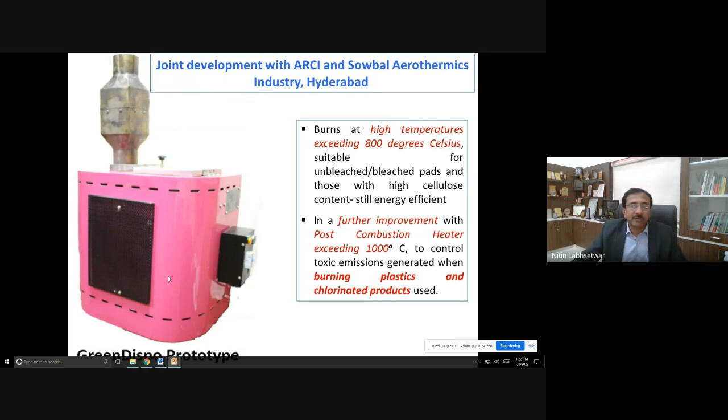Then the second thing: normally the sanitary pads are wet. So you can also design a heating cycle in such a way that we initially make it dry, with a moderate temperature of say 150 to 200 degrees Celsius, and then shoot the temperature up. So this is one thing.

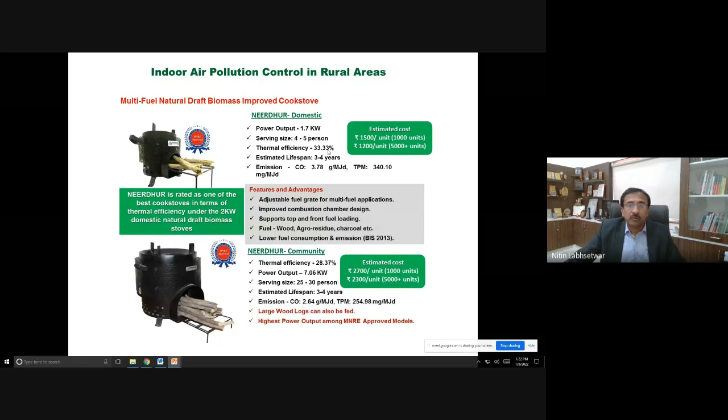And then, as I mentioned, we work on the cook stove. We have our own cook stove, which is approved by the BIS. The rural cook stove that we see when we go to villages gives you efficiency of anything between 15 to 18% thermal efficiency, while this cook stove called NEERDHUR gives you almost double, 33%. The BIS norm is 25%. So we have a few thousand installations, including in Patan district.

It is done in an integrated way and it's becoming very popular, so many CSIR labs are starting to work on that.

Several energy options and improved energy efficiency will be important. Promoting a single option can be very risky because so far we were completely dependent on fossil fuel, and today we land up in environmental problems, and an import-based problem. So we need to keep several energy options, as we understand it's also very strategic. If you have some economic problem in the country, or a war, you need energy. Somebody can stop giving you energy, and somebody can also stop giving you fossil fuel. This is very important.